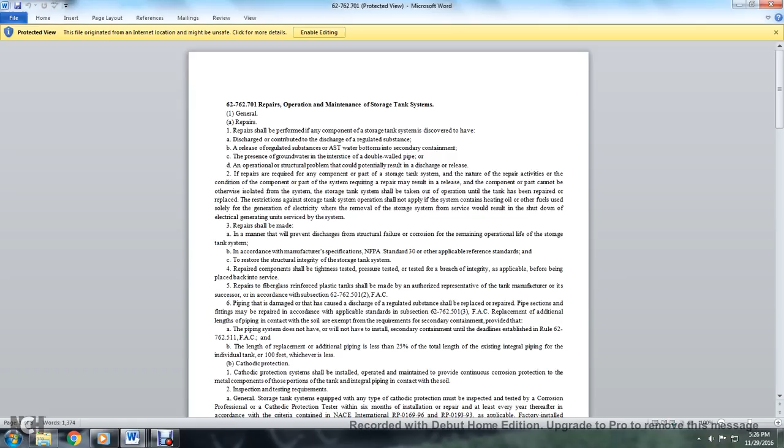Alright, this is going to be part 2 of chapter 62-762, petroleum storage tank systems, above ground storage tanks, and rules coming soon. Rule forms coming soon. Alright, Rule 62-762.701, repairs, operation, maintenance of storage tank systems.

For general repairs: repairs should be performed on any component of the storage tank system discovered to have contributed to a discharge or release of a regulated substance, including above ground storage water bottoms, secondary containment with presence of groundwater interstice, double wall piping, or operational structural components. If repairs are required for any part of the storage tank system, and the nature of the repair activities or the condition of the component requiring repair may result in a release, and the component cannot be otherwise isolated from the system, the storage tank system shall be taken out of operation until the tank has been repaired or replaced.

This restriction against operating the storage tank shall not apply if the system contains heating oil or other fuels used solely for generation of electricity, where removal of the storage system from service would result in the shutdown of electrical generation units serviced by the system.

The repair shall be made in a manner that prevents discharge from structural failure or corrosion for the remaining operational life of the storage tank system, in accordance with the manufacturer's specifications and National Fire Protection Association Standard 30, or applicable reference standards, to restore the structural integrity of the storage tank system.

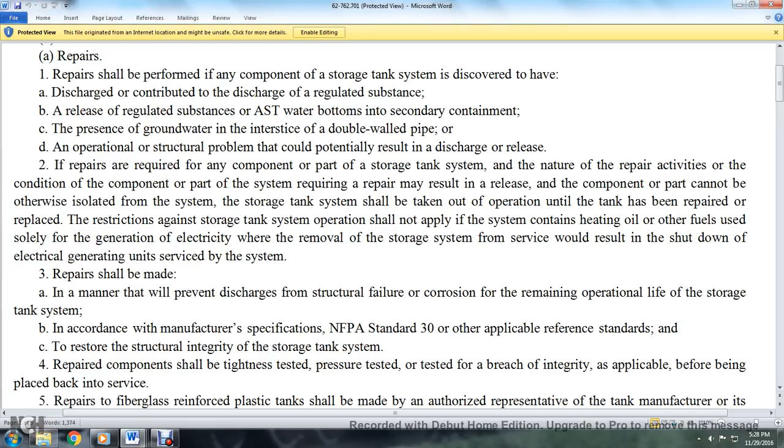Repaired components shall be tightness tested, pressure tested, and tested for breach integrity as applicable before being placed back into service. The repair of a fiberglass reinforced plastic tank shall be made by an authorized representative of the tank manufacturer, or its successor, or in accordance with subsection 62-762.501(2), Florida Administrative Code.

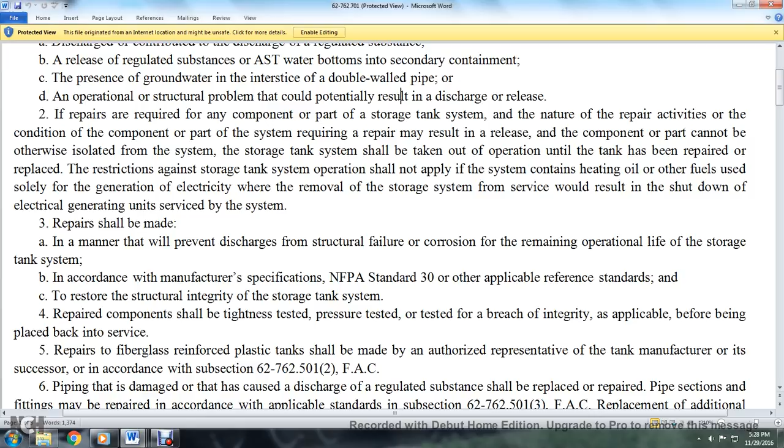Piping that has been damaged caused by the discharge of a regulated substance shall be replaced, and repair of pipe section failures may be repaired in accordance with the applicable standard, subsection 62-762.501(3), Florida Administrative Code.

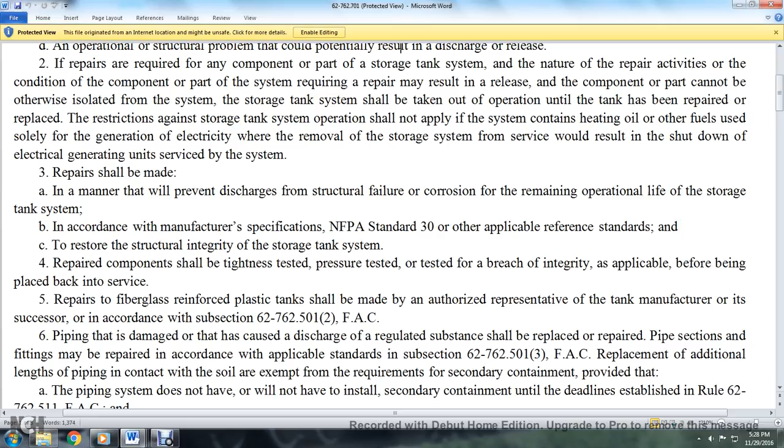Replacement of additional length of pipe in contact with the soil is exempt from the requirements of secondary containment, provided that the piping shall not have to install secondary containment until the deadlines established in Rule 62-762.511, Florida Administrative Code: B, the length of the replacement additional piping is less than 25% of the total length of the existing piping for the individual tank, or 100 feet, whichever is less.

Cathodic protection shall be installed, operated, and maintained to provide continuous corrosion protection to metal components of those portions of the tank and piping in contact with the soil.

Inspection and testing requirements, general: storage tank systems equipped with any type of cathodic protection must be inspected and tested by a Corrosion Professional or a Cathodic Protection Tester within 6 months of installation or repair, and at least every year thereafter, in accordance with the criteria contained in NACE International RP0169-96 or RP0193-93. Applicable factory installed galvanic cathodic protection systems may be tested every 3 years.

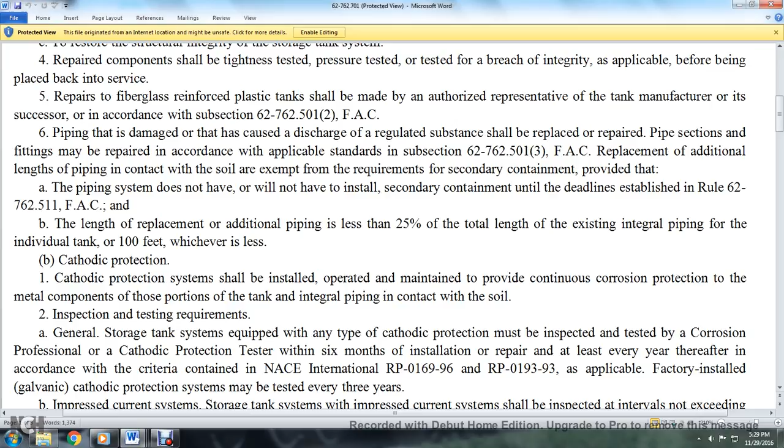Impressed current system: the storage tank system with an impressed current system shall be inspected at intervals not exceeding 2 months. All sources of impressed current shall be inspected. Evidence of proper functioning shall be current output, normal power consumption signal indication, normal operation, and satisfactory electrical state with the protected structure. An impressed current system that is inoperative for a cumulative period exceeding 1,440 hours shall be assessed by a corrosion professional to ensure the storage tank system is structurally sound and free of corrosion holes, operational in accordance with design criteria.

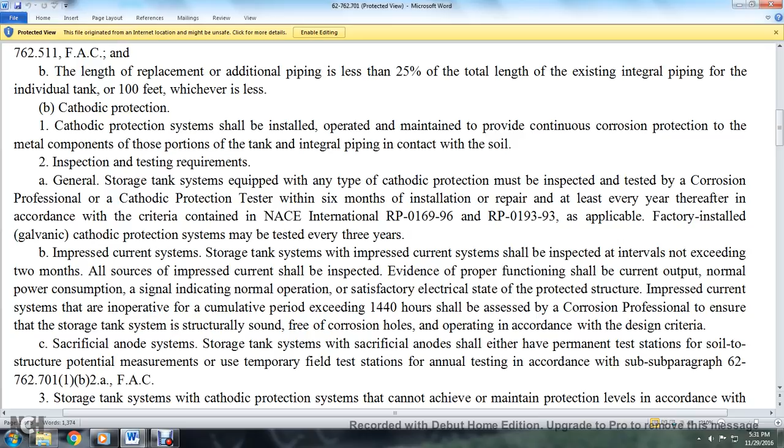Impressed current system: the storage tank system with an impressed current system shall be inspected at intervals not exceeding 2 months. All sources of impressed current shall be inspected. Evidence of proper function shall be current output normal, power consumption signal indication normal operation, satisfactory electrical state with protected structure. An impressed current system inoperative for a cumulative period exceeding 1,440 hours shall be assessed by a corrosion professional to ensure the storage tank system is structurally sound, free of corrosion holes, operational in accordance with design criteria. Structures with sacrificial anodes for storage tank systems with sacrificial anodes shall either have a permanent testing station for a soil-to-structure potential measurement or use a temporary field testing station, with annual testing in accordance with sub-subparagraph 62-762.701(1)(b)2.a., Florida Administrative Code.

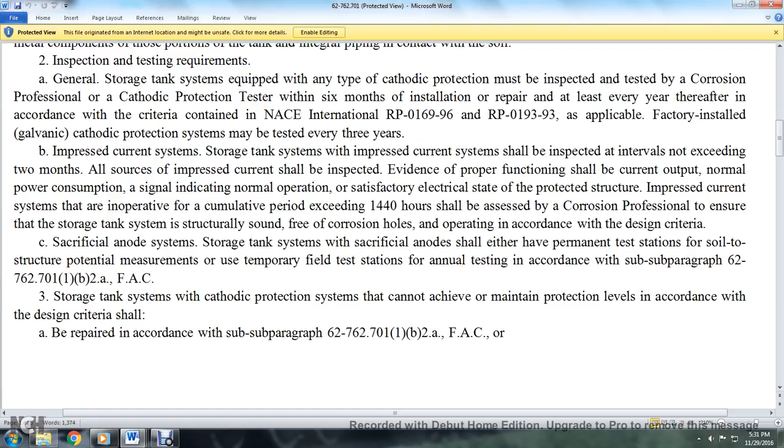Storage tank systems with cathodic protection systems that cannot achieve or maintain protection levels in accordance with the design criteria shall be repaired in accordance with subparagraph 62-762.701(1)(b)(2)(a) of the Florida Administrative Code, or be replaced or taken out of service in accordance with subsection 62-762.800(1), Florida Administrative Code.

The records of continuous operation of the impressed current system and all cathodic protection inspection and testing activities shall be maintained in accordance with paragraph 62-762.701(1)(b) of the Florida Administrative Code's operational maintenance requirements.

Spill containment devices, dispenser liners, and piping systems shall be maintained and provide access for monthly examination. Water removal is necessary. Water collected in spill containment devices, piping systems, and dispenser liners above the opening of any integral piping connection, along with any regulated substance collected within these storage tank systems, shall be removed and either reused or properly disposed of.

Owners and operators should ensure the available capacity in the tank is greater than the volume of regulated substances to be transferred to the tank. Before the transfer is made, they shall ensure that the transfer is monitored to prevent overfilling or spilling.

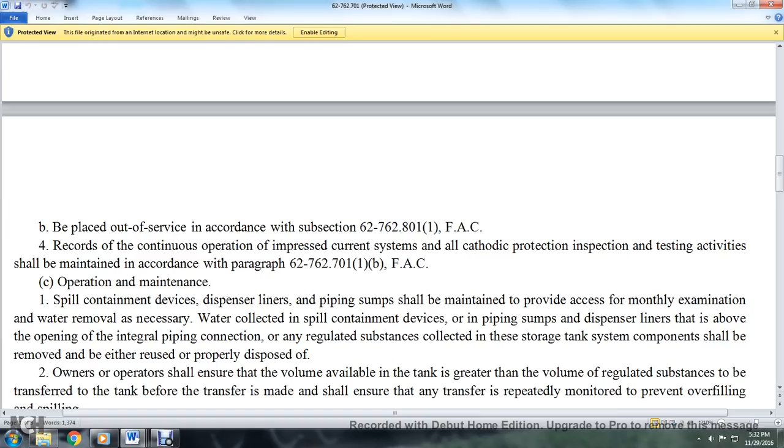All release detection devices shall be tested annually to ensure proper operation. The testing should be conducted per the manufacturer's specifications and should include, at minimum, a determination of whether the device operates as designed.

Petroleum contact with water: the storage tank system shall be managed in accordance with Chapter 62-740, Florida Administrative Code. Exterior coating may be maintained in accordance with SSPC-PA1.

Regardless of the method of release detection used, inventory control shall be performed on above-ground storage tanks containing vehicular fuel that do not have secondary containment, along with stormwater management and secondary containment systems.

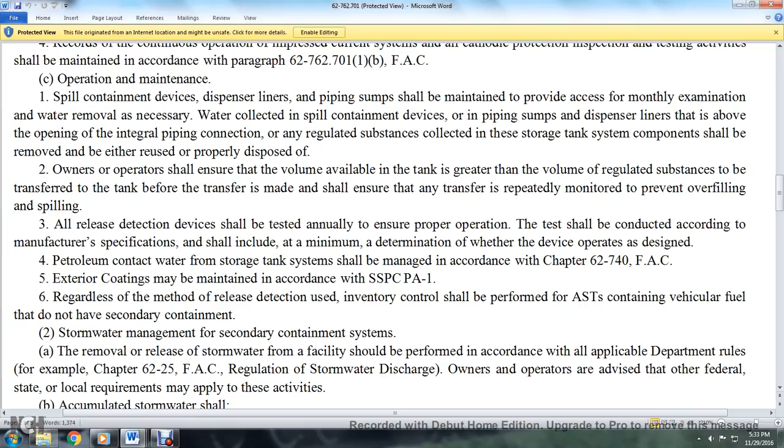Removal or release of stormwater from the facility should be performed in accordance with all applicable department rules, for example Chapter 62-25 of the Florida Administrative Code regulating stormwater discharge. Owners and operators are advised that other federal, state, and local requirements may apply to these activities.

Accumulated stormwater shall be drawn off within one week after a rainfall event, unless another frequency is allowed for the facility's stormwater discharge permit or other instruments such as the Spill Prevention Control and Countermeasure plan. Stormwater with a visible sheen shall not be discharged without treatment, per the department permit.

If gravity drain pipes are used to remove water from the dike or field areas, all valves involved shall be kept closed except when the operator is actively processing the drain water.

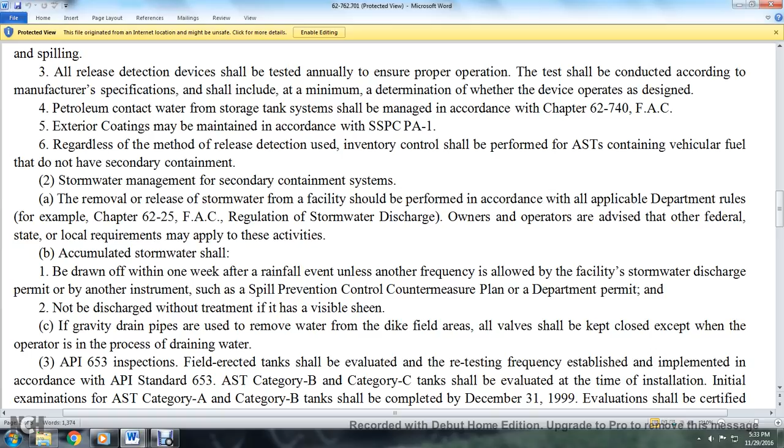API 653 inspection: field-erected tanks shall be evaluated, and the retesting frequency established and implemented in accordance with API Standard 653.

Above-ground storage tank Category B and Category C tanks shall be evaluated at the time of installation. For the initial examination, Category A and Category B tanks shall be completed by December 31st, 1999. The evaluation shall be certified by a professional engineer registered in the State of Florida, or approved by an API 653 inspector. Nondestructive testing shall be performed by qualified personnel as specified by API 653 and API 650.

A field-erected tank shall be repaired in accordance with API 653.

Testing the pipe in contact with the soil: small diameter piping shall be tightness tested before being placed back into service, whenever a dispenser connected to the piping is replaced, or whenever the piping has been disconnected and then reconnected.

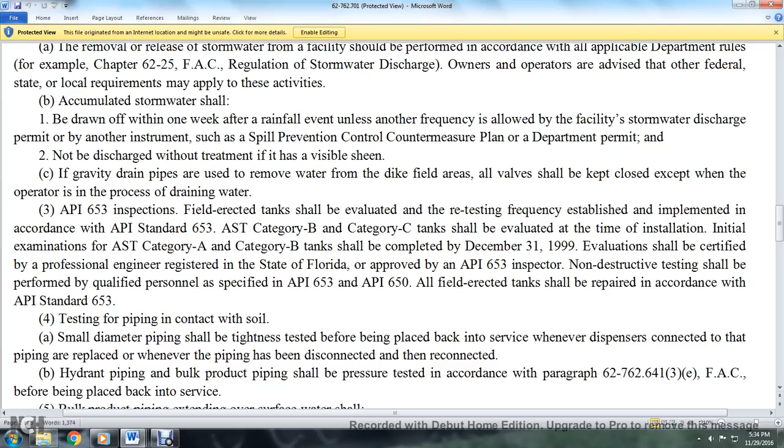Hydrant piping and bulk product piping shall be pressure tested in accordance with paragraph 62-762.641(3)(e) of the Florida Administrative Code before being placed back into service.

Bulk product piping extending over the surface of water shall be tested annually in accordance with Title 33, Part 156.170 of the Code of Federal Regulations, and shall be maintained and operated in accordance with Title 33, Part 154.

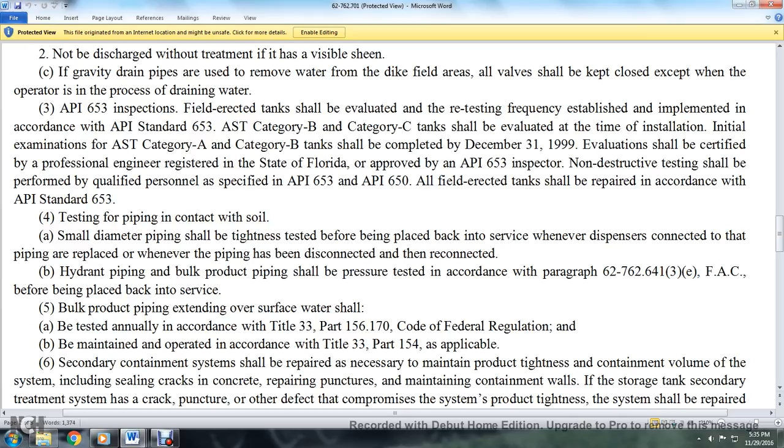Applicable secondary containment systems shall be repaired as necessary to maintain product tightness and containment volume, including sealing cracks in concrete and repairing punctures to maintain the containment wall of the storage tank. Where a secondary containment system has a crack, puncture, or other defect that compromises the system's product tightness, it shall be repaired in accordance with paragraph 62-762.501(1)(e) of the Florida Administrative Code.

Overfill protection shall be performed in accordance with API Recommended Practice 2350 and NFPA 30, Section 2-10, for each field-erected above-ground storage tank that receives fuel from a mainline pipeline or marine vessels. Specific authority statute.

376.303, Florida State Law implemented: 376.303, FS. History–New, June 21st, 2004.

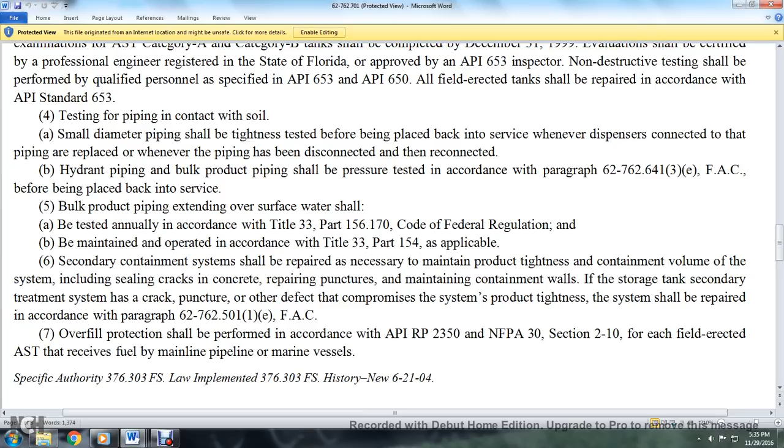Alright, we have this one to go, and another one.

62-762.711, record keeping. All records should be maintained in a permanent form available for inspection by the Department or the County. If the records are not kept at the facility, they should be made available at the facility or another agreed-upon location within 5 working days' notice. Access to the facility should be provided for compliance inspections conducted at reasonable times.

Records of the following shall be kept for 2 years: measurement and reconciliation of inventory, if applicable. Repair, operation and maintenance records of release detection results, including electronic test results, regardless of frequency. Monthly visual inspections performed in accordance with paragraph 62-762.641(2)(e), Florida Administrative Code.

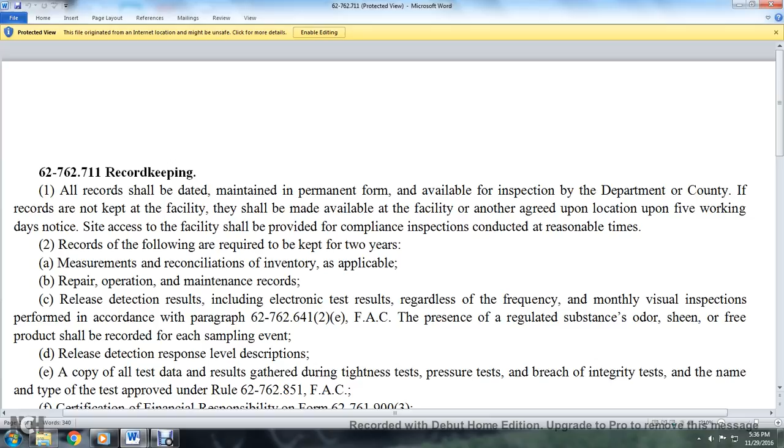The presence of regulated substance odor or sheen of the product shall be recorded with each sampling event. Release detection response level description. A copy of all test data results gathered during the tightness test and pressure test and breach of integrity test, and the name and type of test approved under 62-762.851, Florida Administrative Code. Certification of Financial Responsibility Form 62-761.900(3).

Record of the type of fuels stored in each tank, and of the repair or replacement of gaskets, valve packing, valve flanges, connecting and disconnecting fittings of bulk product piping when the repair or replacement is performed. The response to a discharge or loss of regulated substance. Records of the following generated after July 13, 1998 shall be maintained for the life of the storage tank system.

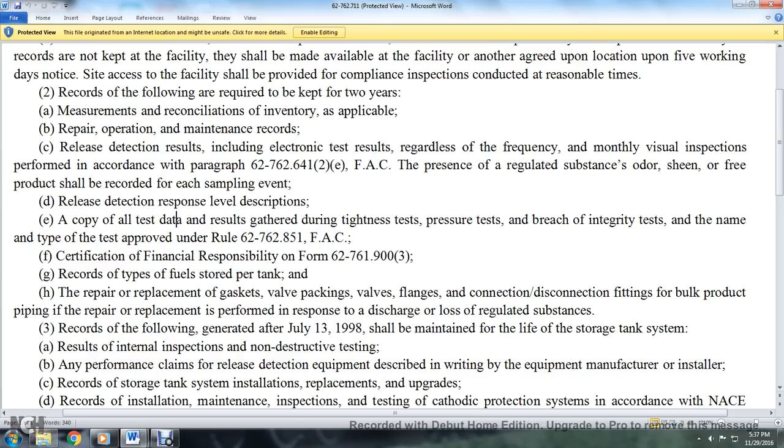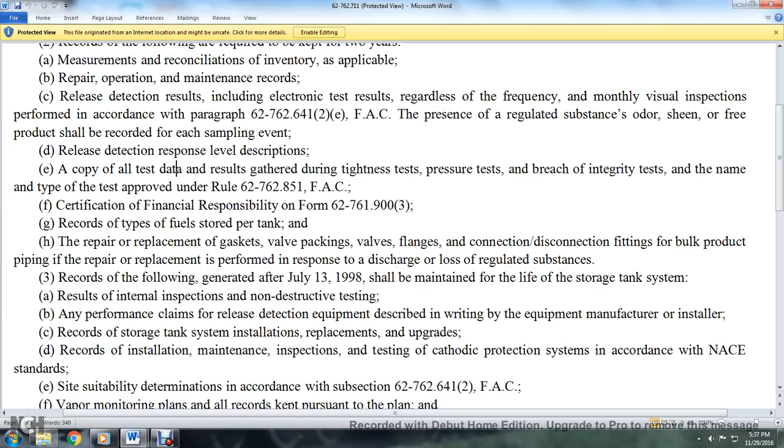The results of internal inspections, non-destructive testing, any performance claims for release detection equipment described in writing by the equipment manufacturer, and records of storage tank installation, replacement, and upgrades. Records of the installation, maintenance, inspection and testing of the cathodic protection system in accordance with NACE standards, and of site suitability determinations in accordance with subsection 62-762.641(2), Florida Administrative Code. Vapor monitoring plans.

All records kept pursuant to the plan. The closure assessment report, if the location continues as a facility. Specific authority 376.303, Florida Statutes. Law implemented 376.303, Florida Statutes. History: New June 21st, 2004.

And this is probably the last one. Let me check real quick. Well, we got 801.

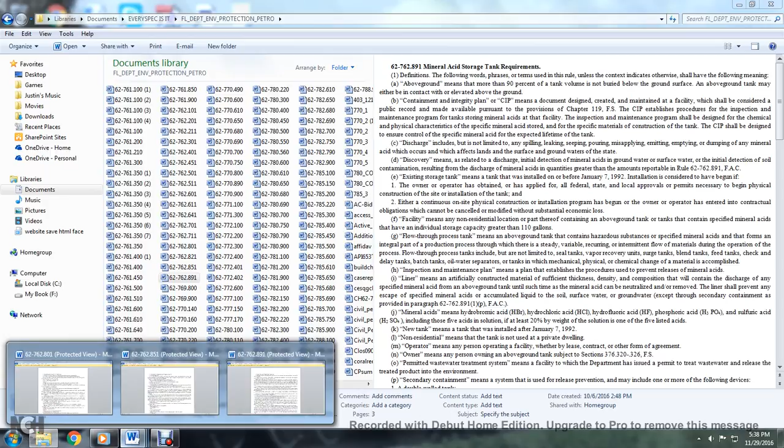All right, 62-762.801, out-of-service and closure requirements. Temporarily out of service: storage tank systems that are temporarily out of service shall continue to operate and maintain corrosion protection in accordance with paragraph 62-762.701(1)(b), Florida Administrative Code. The tank shall have an external release detection method, performing release detection monthly in accordance with the applicable provisions of 62-762.601 through 641, Florida Administrative Code, leaving the venting system open and functioning.

Out of service storage tank systems: in general, storage tank systems that are taken out of service, defined in subsection 62-762.201(53), Florida Administrative Code, shall continue to operate and maintain corrosion protection in accordance with paragraph 62-762.701(1)(b), Florida Administrative Code, and perform external release detection for sites without contamination, if applicable, every 6 months in accordance with the provisions of subsection 62-762.641(2), Florida Administrative Code.

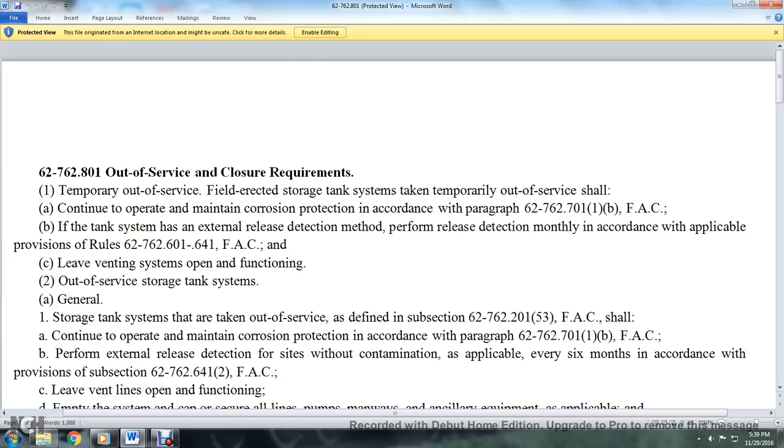Leave the vent lines open and functional, empty the system, cap and secure all lines, pumps, manways, and ancillary equipment as applicable, and secure and close off the system from outside access. If the storage tank system is required to be upgraded during the time that it is out of service, it shall be upgraded or replaced in accordance with this chapter before it is returned to service.

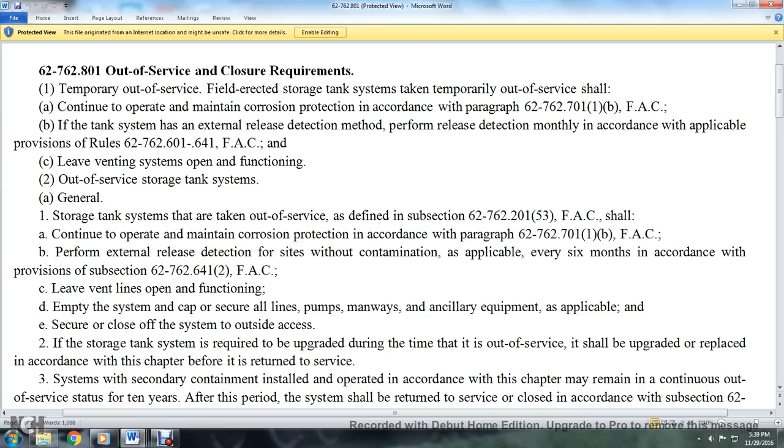Systems with secondary containment installed and operated in accordance with this chapter may remain in continuous out of service status for 10 years, after which the system shall be returned to service or closed in accordance with section 62-762.801(3), Florida Administrative Code. Tightness or pressure tests shall be performed in accordance with subsection 62-762.641(3), Florida Administrative Code, as applicable, before any system is returned to service.

Systems without secondary containment shall not remain in continuous out of service status for more than 5 years. Before expiration of the 5-year time period, any remaining product and sludge shall be removed and a closure assessment shall be performed in accordance with subsection 62-762.801(4), Florida Administrative Code.

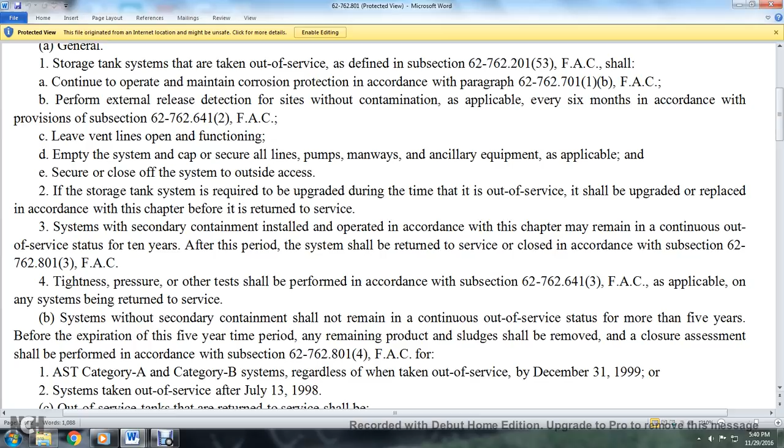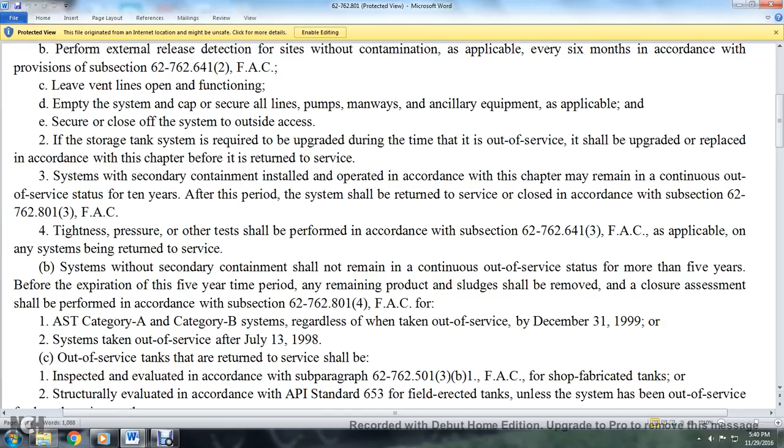The above-ground storage tank, the Category A and Category B systems, regardless of whether taken out of service before December 31st, 1999, or systems taken out of service after July 13, 1998, an out-of-service tank returned to service shall be inspected and evaluated in accordance with subparagraph 62-762.501(3)(b)1, Florida Administrative Code, for shop fabricated tanks, and structurally evaluated in accordance with API Standard 653 for field-erected tanks, unless the system has been out of service for less than 6 months. A field-erected tank changing the type of product stored within the tank shall comply with API Standard 653, section 2.2.4.

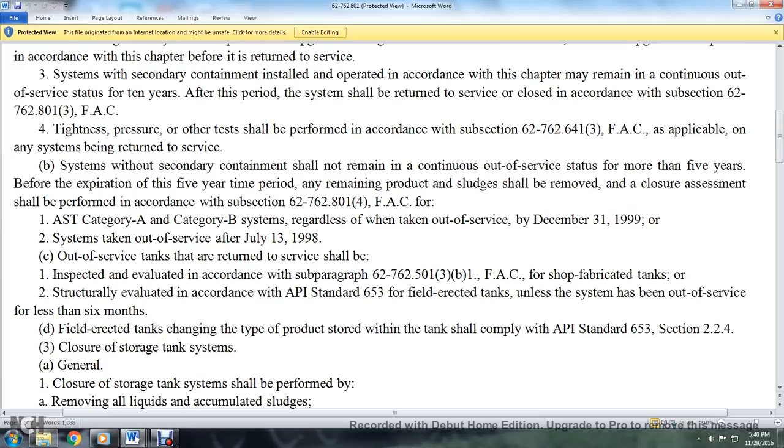Closure of storage tanks in general: the closure of the storage tank shall be performed by removing all the liquids and accumulated sludges; disconnecting, capping, or removing integral piping; manways shall be secured to prevent access; closing the storage tank in accordance with paragraph 62-762.801(3)(b), Florida Administrative Code, as applicable; and conducting a closure assessment in accordance with subsection 62-762.801(4), Florida Administrative Code.

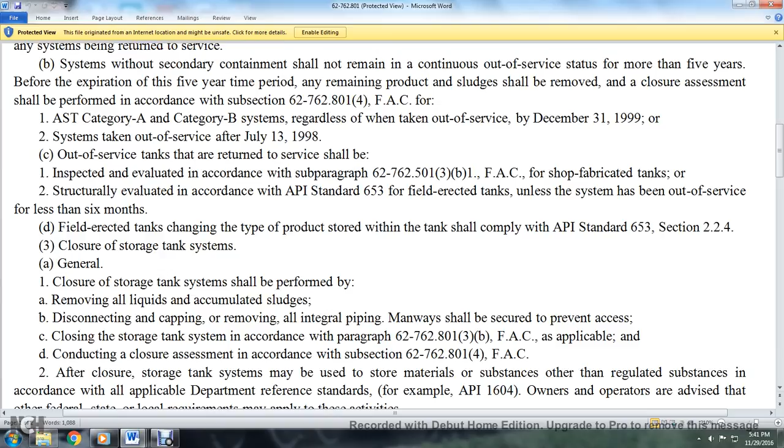After closure, the storage tank system may be used to store materials or substances other than regulated substances in accordance with the applicable Department reference standards, for example API 1604. Owners and operators are advised that other federal, state, and local requirements may apply to these activities. Monitoring wells associated with the closed system that are not being used for release detection or site assessment purposes should be closed in accordance with paragraph 62-762.601(1)(k).

Florida Administrative Code. Unmaintained systems shall be permanently closed within 90 days of the discovery. The tank shall be rendered free of pollutant vapors at the time of closure, prevent hazardous explosive conditions, and be maintained to prevent future explosive conditions. The tank should be protected from flotation in accordance with NFPA 30, section 26.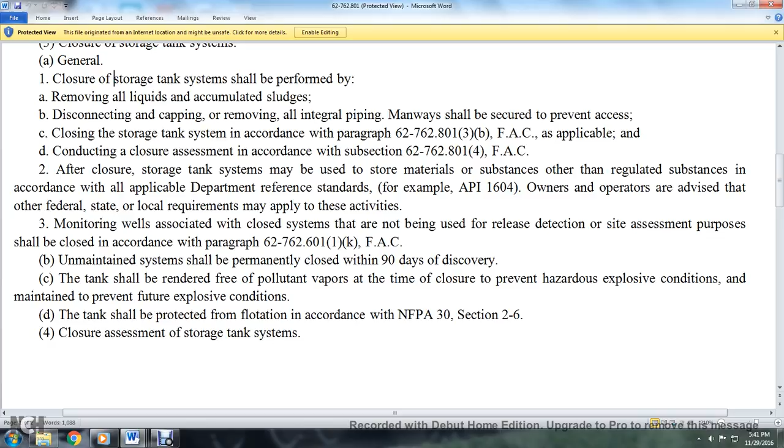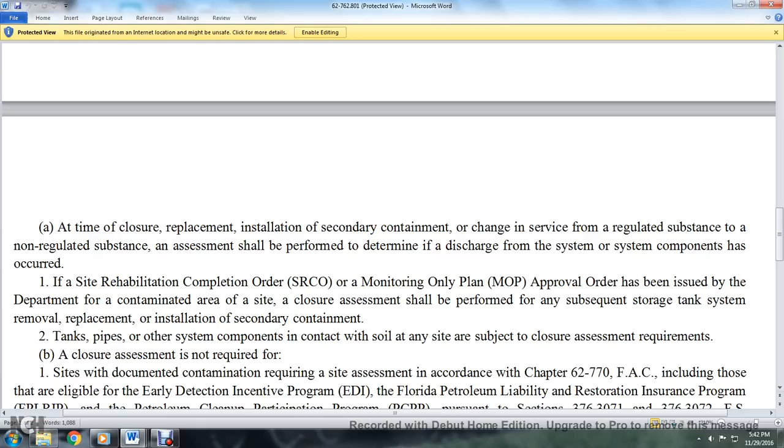Closure assessment of the storage tank system. A. At the time of closure, replacement, installation of secondary containment, or change from a regulated substance to a non-regulated substance, an assessment shall be performed to determine if a discharge from the system or system components has occurred. If a site rehabilitation completion order or monitoring only plan approval order has been issued by the department for the contaminated area of the site, a closure assessment shall be performed for any subsequent storage tank system removal, replacement, installation of secondary containment. 2. Tanks, pipes, or other system components in contact with the soil at any site are subject to the closure assessment requirements.

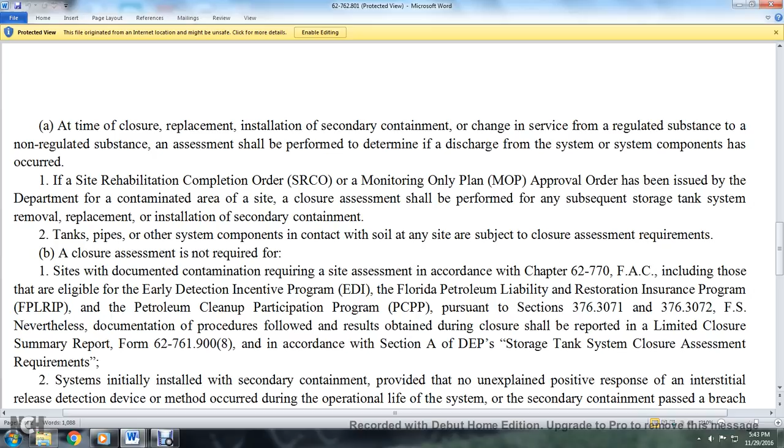B. The closure assessment is not required for sites with documented contamination requiring site assessment in accordance with Chapter 62-770, Florida Administrative Code, including those that are eligible for the Early Detection Incentive Program, the Florida Petroleum Liability and Restoration Insurance Program, or the Petroleum Cleanup Participation Program pursuant to Sections 376.3071 and 376.3072, Florida Statutes. Nevertheless, documentation of procedures followed and results obtained during the closure shall be reported with the Limited Closure Summary Report Form 62-761.900 in accordance with section A of the DEP Storage Tank System Closure Assessment Requirements.

2. Systems initially installed with secondary containment, provided there was no unexplained positive response from the interstitial release detection device or method during the operational life of the system, or the secondary containment passed a breach of integrity test prior to closure. Systems upgraded with secondary containment that are closed, where a closure assessment was performed prior to installation of the secondary containment, provided the secondary containment passed a breach of integrity test in accordance with paragraph 62-762.641(3)(a), Florida Administrative Code.

Double wall shop fabricated above ground tanks with a storage capacity less than 1,100 gallons, upgraded with secondary containment, that are elevated and not in contact with the soil. Instead of performing the closure assessment, a visual inspection may be performed of the system and the ground surface underneath for signs of a discharge. Written certification shall be provided to the county within 10 days after the installation of secondary containment, documenting that there has been no discharge, in lieu of a closure assessment.

The sampling analysis should be conducted according to the DEP Storage Tank System Closure Assessment Requirements. The closure assessment report shall be submitted to the county within 60 days of the completion of any of the activities listed in paragraph 62-762.801(4)(a), Florida Administrative Code. The report shall include the sample types, sample locations, measurement methods, site map, method of maintaining quality assurance and quality control, and any analytical results obtained during the assessment, in accordance with the DEP Storage Tank System Closure Assessment Requirements.

Persons are advised that contaminated soil that is excavated, disposed of, or stockpiled on the site during the closure of the storage tank system is regulated by Chapter 62-770, Florida Administrative Code. Specific authority 376.303, Florida Statutes, and 376.303, Florida Statutes. History: New, June 21st, 2004.

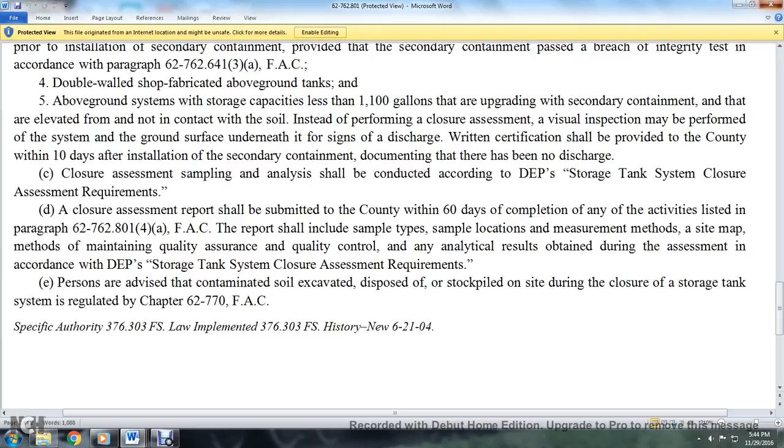Alright, 62-762.851. Alternative requirements, equipment approval. The alternative requirement. Any person subject to the provisions of the chapter may request a written determination of the secretary or the secretary's designee that any of the requirements of the chapter shall not apply to the regulated storage tank system at a facility, and shall request the approval of the alternate procedure or requirement.

The request shall set forth at minimum the following information: the specific storage tank system of the facility for which the exception is sought, the specific provision of chapter 62-762 Florida Administrative Code from which exception is sought, with the basis for the exception, the alternative procedure or requirement for which approval is sought. Documentation demonstrating the alternative procedure for the requirement provides an equivalent or greater degree of protection for the lands, surface waters, and groundwaters of the state as established by the requirement.

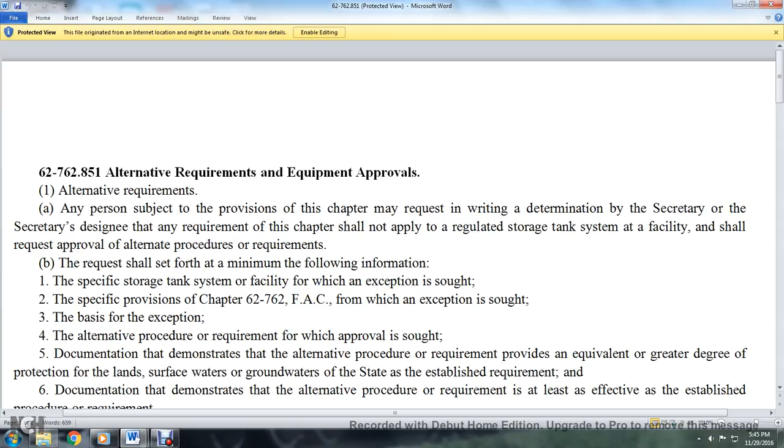Documentation demonstrating the alternative procedure for the requirement is at least as effective as the established procedure of the requirement. If any alternate procedure requirement is not available to be sought under subparagraphs 5 and 6, documentation demonstrating that the specific provision of the chapter from which the exception is sought imposes regulatory costs on the regulated entity that could be reduced through the approval of a less costly regulatory alternative requirement that provides a substantially equivalent degree of protection of the lands, surface waters, and groundwaters of the state as established in the requirement.

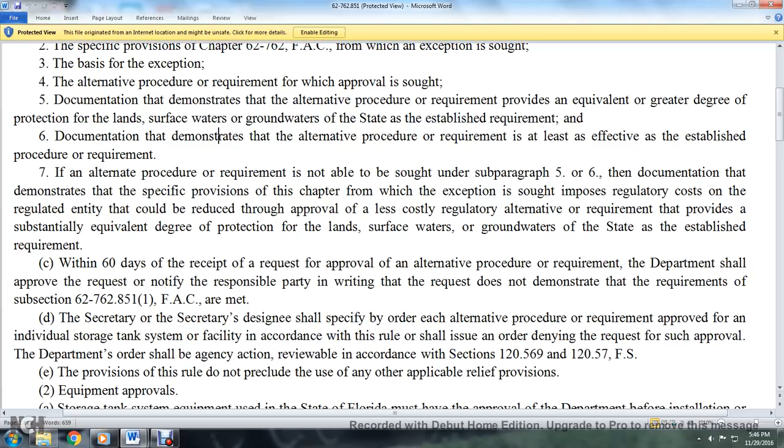C. Within 60 days of the receipt of the request for approval of the alternative procedure for the requirement, the department shall approve the request or notify the responsible party in writing that the request does not demonstrate that the requirements of subsection 62-762.851 Florida Administrative Code are met. Alright, D. The Secretary's designee shall specify by order the alternative procedure requirements approved for an individual storage tank system facility in accordance with these rules, or shall issue an order denying the request for such approval. The department order shall be agency action reviewable in accordance with sections 120.569 and 120.57, Florida Statutes. The provisions of this rule do not preclude the use of any other applicable relief provisions.

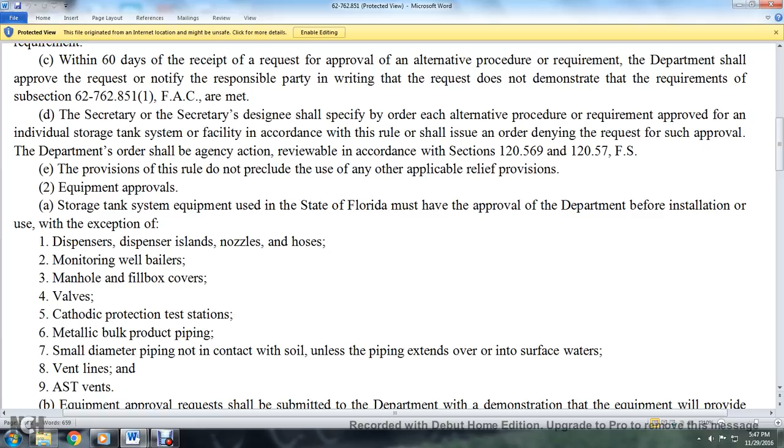2. Equipment approval. Storage tank system equipment put into use in the state of Florida must be approved by the department before installation or use, with the exemption of dispenser islands, nozzles, hoses, monitoring well bailers, manhole and fillbox covers, valves, cathodic protection test stations, metallic bulk product piping, small diameter piping not in contact with the soil unless the piping extends over surface waters, vent lines, and aboveground storage tank vents. Equipment approval requests should be submitted to the department demonstrating that the equipment will provide equivalent protection meeting the appropriate performance standards contained in this chapter.

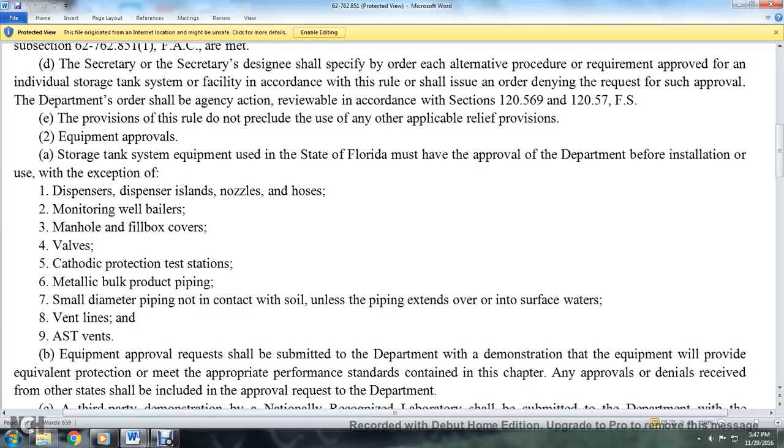Any approvals or denials received from other states shall be included with the approval request to the department. A third-party demonstration by a nationally recognized laboratory shall be submitted to the department with the application. The third-party demonstration shall provide a technical evaluation of the equipment, test results verifying the equipment will function as designed, and professional certification that the equipment meets the performance standards contained in Rule 62-762.501 Florida Administrative Code.

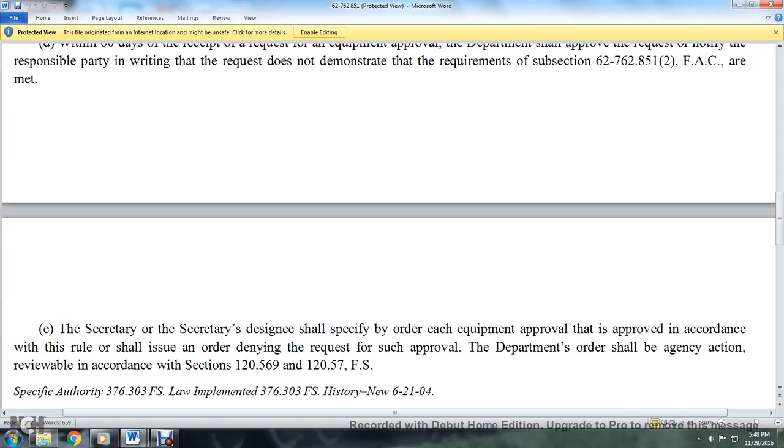D. Within 60 days of the receipt of the request for equipment approval, the department shall approve the request or notify the responsible party in writing that the request does not demonstrate the requirements of subsection 62-762.851(2) Florida Administrative Code are met. The secretary's designee shall specify by order each equipment approval that is approved in accordance with the rules, or shall issue an order denying the request for such approval. The department order shall be agency action reviewable in accordance with sections 120.569 and 120.57 Florida Statutes. Specific authority 376.303 Florida Statutes, law implemented 376.303 Florida Statutes. History new June 21st, 2004.

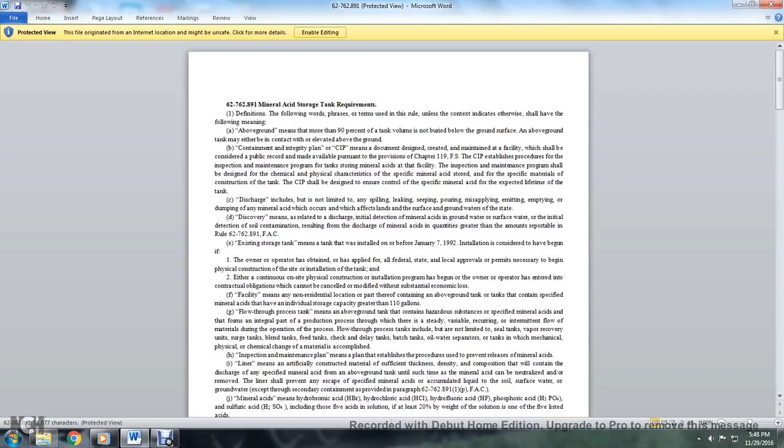And I believe we got one more of these to read. And it's pretty lengthy. All right.

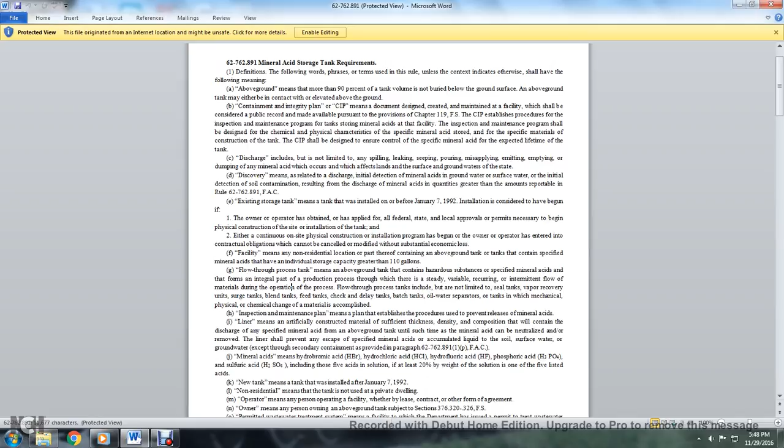62-762.891, mineral acid storage tank requirements. Definitions: the following words, phrases, or terms used in the rule, unless the context indicates otherwise, shall have the following meaning. Above ground means with more than 90% of the tank volume not buried below the ground surface; the tank may either be in contact with the ground or elevated above the ground.

Containment integrity plan, or CIP, means the document designed, created, and maintained at the facility, which shall be considered a public record made available pursuant to the provisions in Chapter 119 Florida Statutes. The containment integrity plan establishes procedures for the inspection and maintenance program for the tanks storing mineral acid at the facility. The inspection and maintenance program shall be designed for the chemical and physical characteristics of the specific mineral acid stored and the specific material of construction of the tank.

The containment integrity plan shall be designed to ensure control of the specific mineral acid for the expected life of the tank. Discharge includes but is not limited to any spilling, leaking, seeping, pouring, misapplying, emitting, emptying, and dumping of any mineral acids which occurs and which affects the lands and the surface or groundwaters of the state.

Discovery means, related to the discharge, the initial detection of the mineral acid in the groundwater or surface water, or initial detection of soil contamination resulting from the discharge of mineral acids if the quantity is greater than the reportable amount in Rule 62-762.891, Florida Administrative Code.

Existing storage tank means a tank that was installed on or before January 7, 1992. Installation is considered to have begun if the owner or operator has obtained or applied for all federal, state, and local approvals and permits necessary to begin physical construction of the site and installation of the tank, and either a continuous on-site physical construction or installation program has begun, or the owner or operator has entered into contractual obligations which cannot be canceled or modified without substantial economic loss.

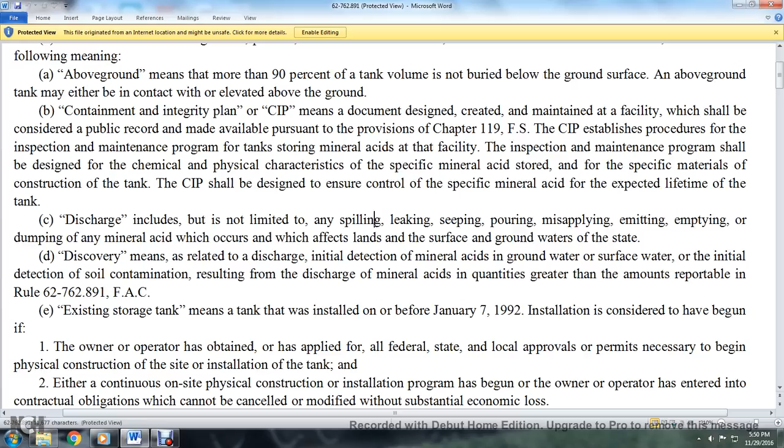Facility means any non-residential location, or part thereof, containing an above-ground tank or tanks that contain specified mineral acids and have an individual storage tank capacity greater than 110 gallons.

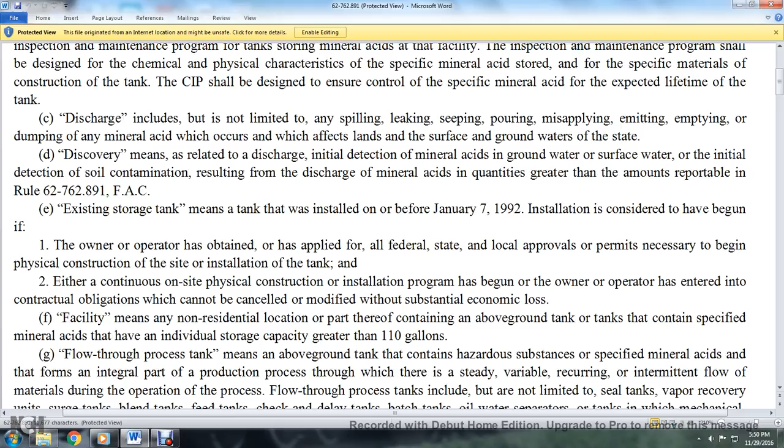G. Flow-through process tank means an above-ground tank that contains a hazardous substance or specified mineral acid and forms an integral part of a production process through which there is a steady, variable, recurring, or intermittent flow of materials during the operation of the process. Flow-through process tanks include but are not limited to seal tanks, vapor recovery units, surge tanks, blending tanks, feed tanks, check and delay tanks, batch tanks, and oil-water separator tanks, in which mechanical, physical, or chemical change of the material is accomplished. Inspection and maintenance plan means the plan established in the procedure used to prevent release of the mineral acids.

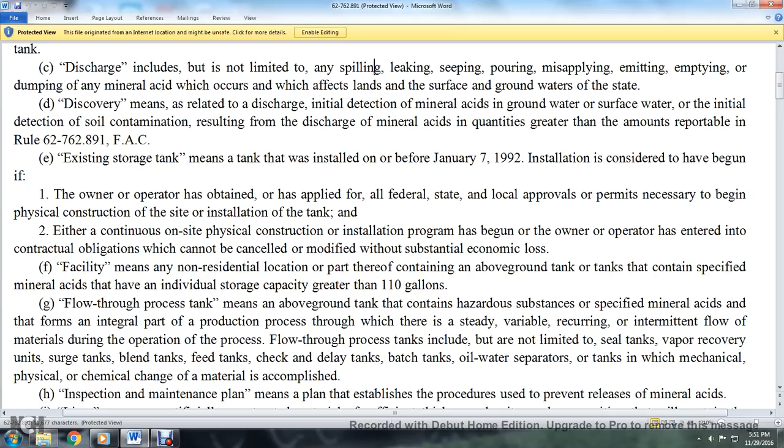Liner means an artificially constructed material of sufficient thickness, density, and composition that will contain the discharge of any specified mineral acid from the above-ground tank until such time the mineral acid can be neutralized and/or removed. The liner shall prevent any escape of the specified mineral acids or accumulated liquid to the soil, surface water, and/or groundwater, except for the secondary containment that is provided in paragraph 62-762.891(1)(p), Florida Administrative Code.

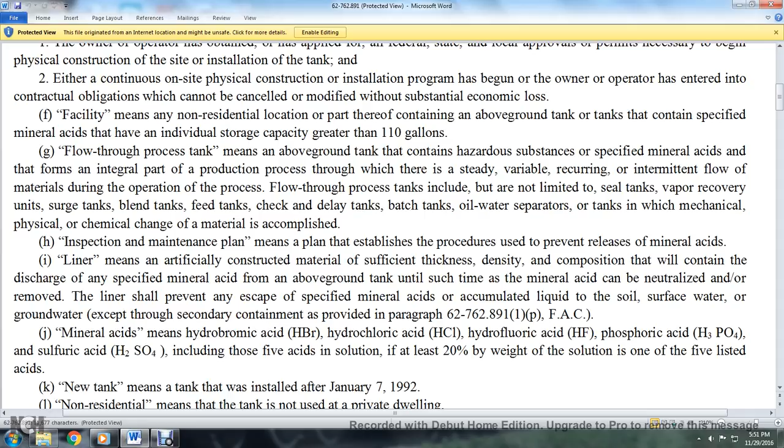Mineral acids means hydrobromic acid, hydrochloric acid, hydrofluoric acid, phosphoric acid, or sulfuric acid, including those 5 acids in solution if at least 20% of the weight of the solution is one of the 5 acids. New tank means a tank installed after January 7, 1992. Non-residential means the tank is not used by a private dwelling.

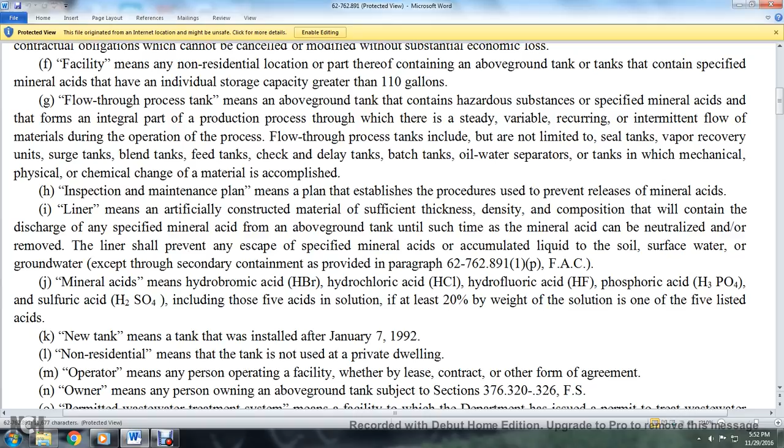Operator means any person operating a facility, whether by lease, contract, or other form of agreement. Owner means any person owning an above-ground tank subject to Sections 376.320 through 376.326, Florida Statutes. Permitted wastewater treatment system means a facility for which the department has issued a permit to treat wastewater with the release of the treated product into the environment.

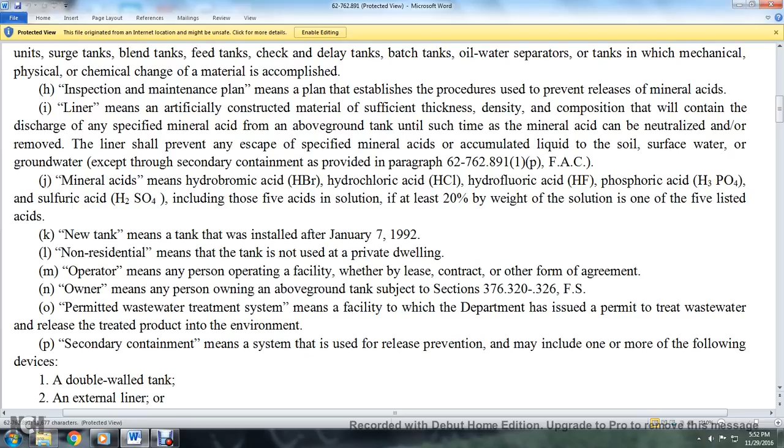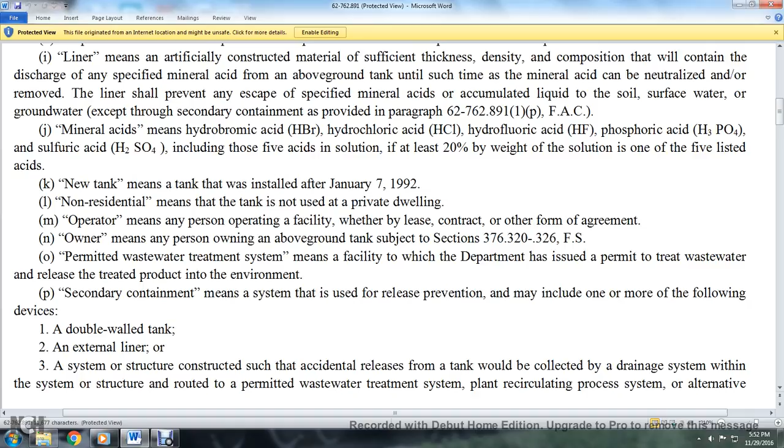Secondary containment means a system used for release prevention and may include one or more of the following devices: a double-walled tank, an external liner system, a structure constructed such that an accidental release from the tank would be collected by a drain system within the structure and routed to a permitted wastewater treatment system, plant recirculating process system, or an alternative containment system approved by the department in accordance with Rule 62-762.851.

Stationary means the tank is not meant to be moved to multiple sites and is used to remain in one location of the facility site for a period of 180 days or longer. Tank means an above ground stationary device constructed primarily of non-earthen materials, concrete, metal, plastic, glass, that provides structural support, designed primarily to contain mineral acids.

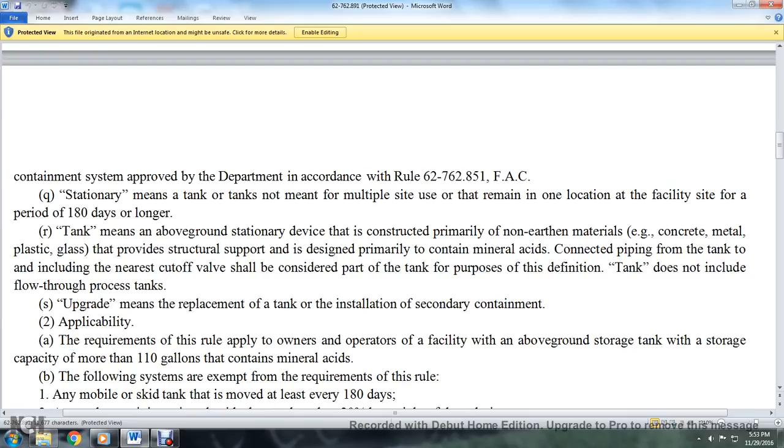Connected piping from the tank, including the nearest cutoff valve, shall be considered part of the tank for purposes of the definition. Tank does not include flow-through process tanks. Tank upgrade means the replacement of the tank or the installation of secondary containment. Applicability: requirements of the rules apply to owners and operators of facilities with above-ground storage tanks with a storage capacity of more than 110 gallons containing mineral acids.

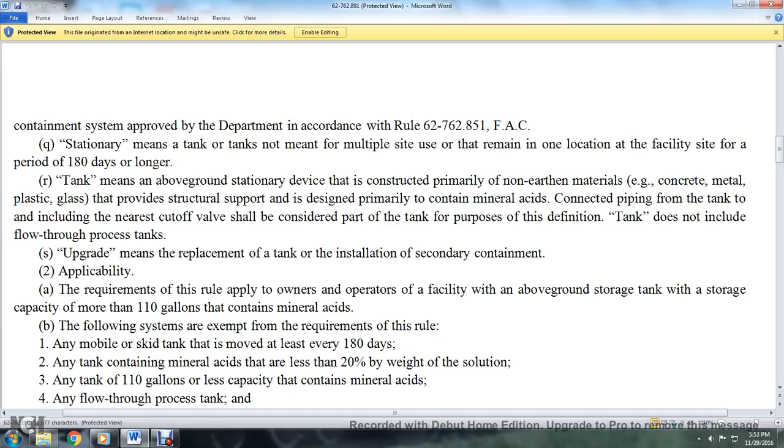The following systems are exempt from the requirements of this rule: any mobile or skid tank moved at least once every 180 days. Any tank containing mineral acid that is less than 20% by weight of the solution. Any tank of 110 gallons or less capacity that contains mineral acids. Any flow-through process tank. Any tank containing mineral acids that are regulated as hazardous waste under Subtitle C of the Resource Conservation and Recovery Act. Registration.

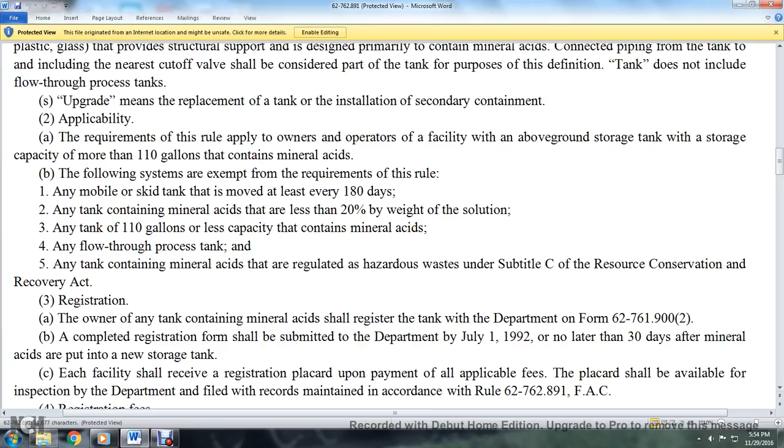The owner of any tank containing mineral acid shall register the tank with the department on Form 62-761.900(2). Completed registration forms shall be submitted to the department by July 1st, 1992, or no later than 30 days after mineral acids are put in a new storage tank. Each facility shall receive a registration placard upon payment of the applicable fees. The placard should be available for inspection by the department, filed with the records maintained in accordance with Rule 62-762.891, Florida Administrative Code.

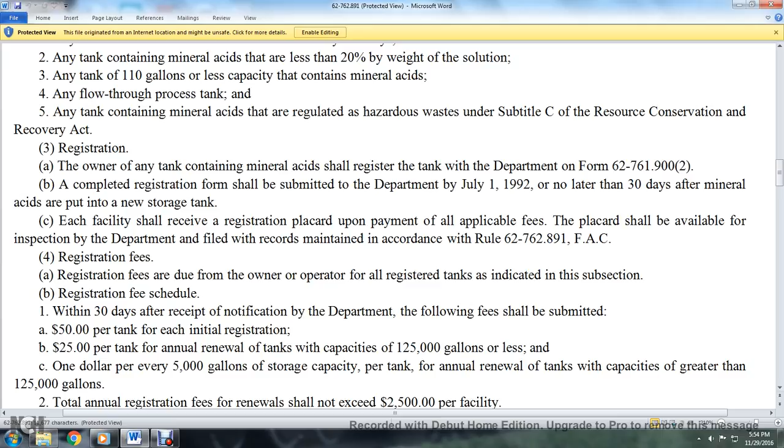Registration fees. The registration fees are due from the owner or operator for all registered tanks as indicated in the registration fee schedule subsection. Within 30 days after receipt of notification from the department, the following fees shall be submitted: $50 per tank for the initial annual registration, $25 per tank for annual renewal of tanks with a capacity of 125,000 gallons or less, $1 per every 5,000 gallons of storage capacity per tank for annual renewal of tanks with a capacity greater than 125,000 gallons. Total annual registration fees for renewal shall not exceed $2,500 per facility.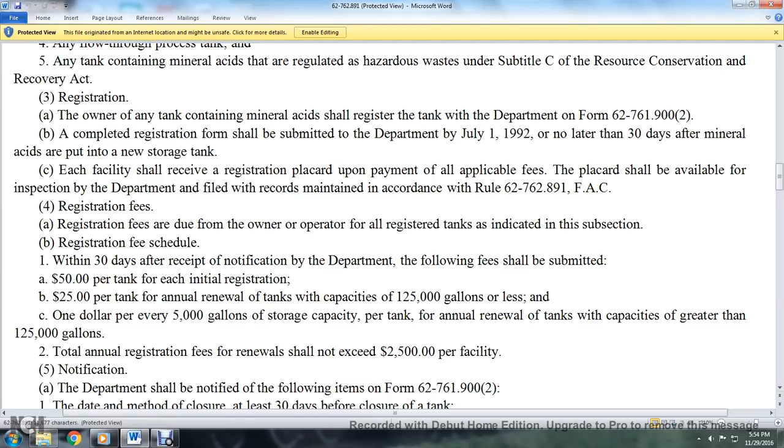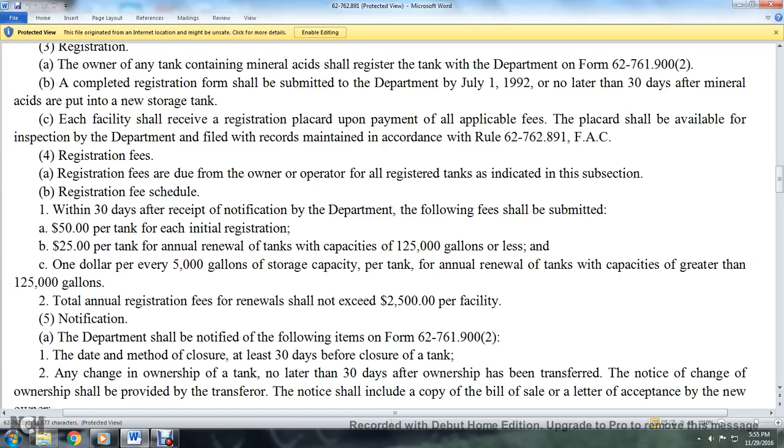Notification: the department shall be notified of the following items on Form 62-761.900(2). The date and method of closure at least 30 days before closure of the tank. Any change of ownership of the tank no later than 30 days after ownership has been transferred. The notice of change of ownership shall include a copy of the bill of sale or a letter of acceptance by the new owner. Upgrading the tank at least 10 days before the upgrading occurs, except for emergency replacement of tanks and connected piping required by an actual or anticipated discharge. Emergency replacement notification should be provided within 10 days after the emergency replacement.

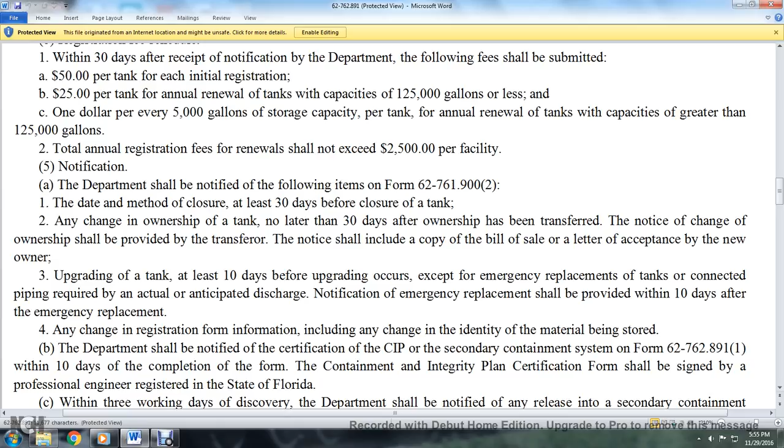Any change in registration information, including any change in the identity of the material being stored, shall be notified to the department, as well as certification of the CIP or secondary containment system on Form 62-762.891(1) within 10 days of completion. The containment integrity plan certification form shall be signed by a professional engineer registered in the state of Florida.

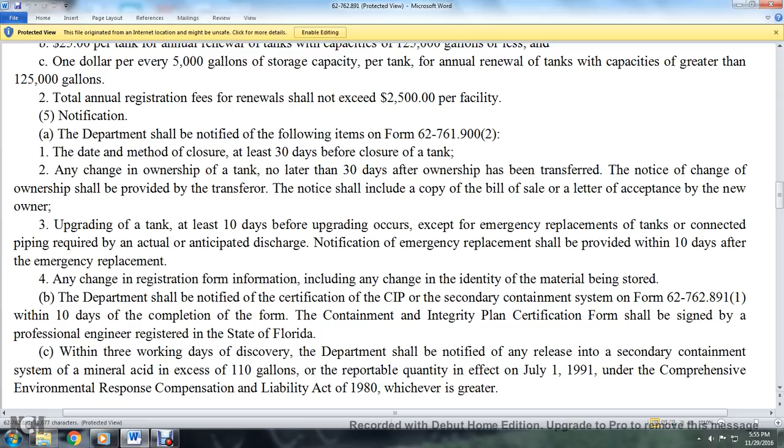Within 3 working days of discovery, the department shall be notified of any release into a secondary containment system of mineral acid in excess of 110 gallons or the reportable quantity effective July 1st, 1991, under the Comprehensive Environmental Response, Compensation, and Liability Act of 1980, whichever is greater. Reporting discharges: within 24 hours of discovery or before the close of the next business day, Form 62-761.900(1) shall be used to report any discharge exceeding 100 pounds of hydrofluoric acid, 1,000 pounds of sulfuric acid, or 5,000 pounds of hydrochloric or phosphoric acid. Performance standards of mineral acid tanks.

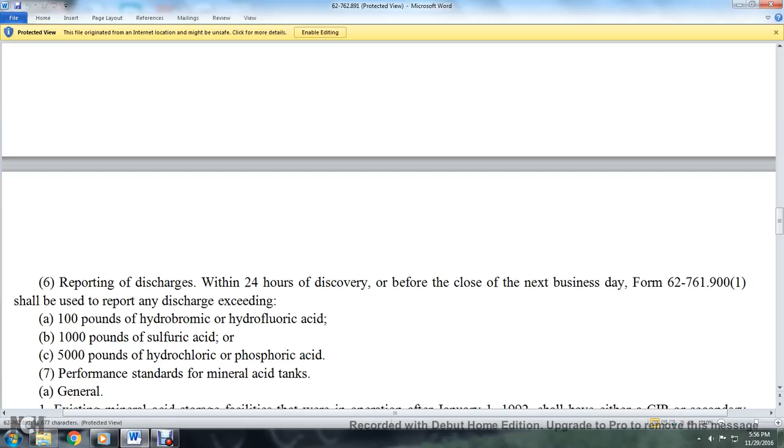In general, existing mineral acid storage facilities that were in operation after January 1st, 1992 shall have either a CIP or secondary containment, and new or replacement mineral acid tanks installed after July 1st, 1992 shall have secondary containment with integrity plans. Containment integrity plans should include procedure requirements to minimize the risk of spills, releases, and discharges from the tanks. The containment integrity plans should be reviewed and updated at least every 2 years by a professional engineer registered in the state of Florida. The containment integrity plan shall be made available for inspection by the department and shall address an inspection and maintenance program detailing the qualifications of the person performing the inspection.

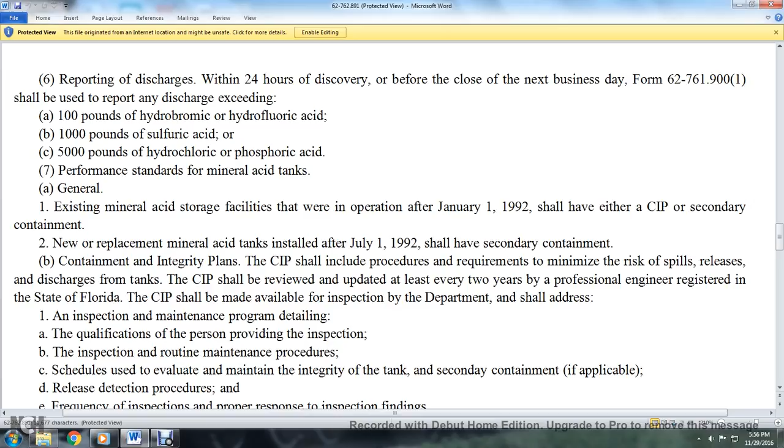The inspection and routine maintenance procedure schedule used to evaluate and maintain the integrity of the tank, including secondary containment if applicable, release detection procedures, frequency of inspection, proper response to inspection findings, the material and construction of each tank, and the compatibility of materials with mineral acids.

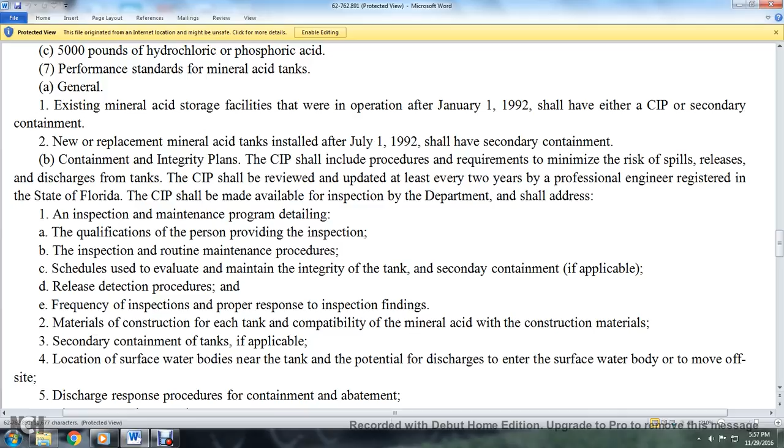Secondary containment of the tanks, if applicable, location relative to surface water bodies near the tank, the potential for discharge to move off site, and response procedures for containment, abatement, and cleanup of tanks without secondary containment.

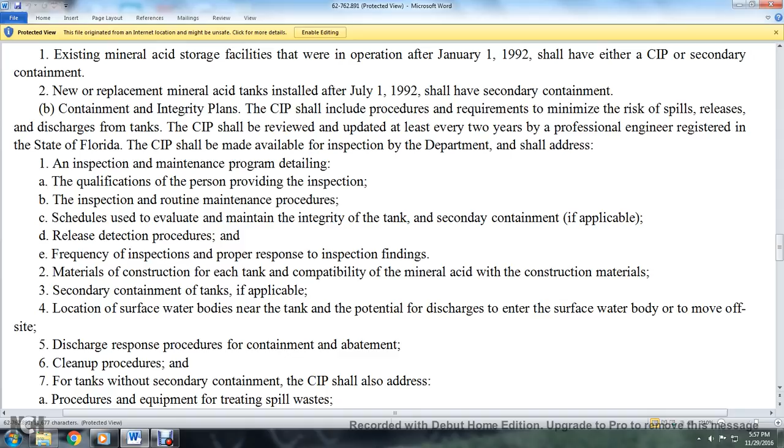The containment integrity plan shall also address procedures and equipment for treating spill waste, procedures for disposing of spill waste, and diversion structures to prevent discharge to nearby surface water bodies or from moving off site.

Demonstrating corrosion protection of the tanks if they are in contact with the soil. Containment integrity plan alternatives. In place of the CIP, a certification may be provided to the department by a professional engineer registered with the State of Florida.

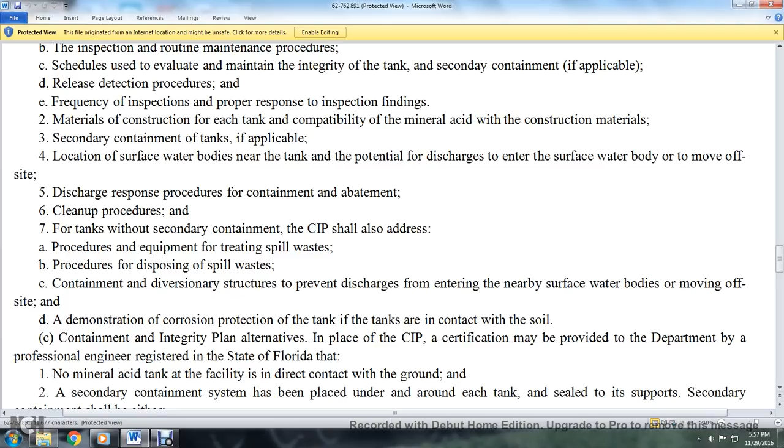No mineral acid tank at the facility is in direct contact with the ground, a secondary containment system has been placed under and around the tank. Sealed to its supports. Secondary containment shall be either...

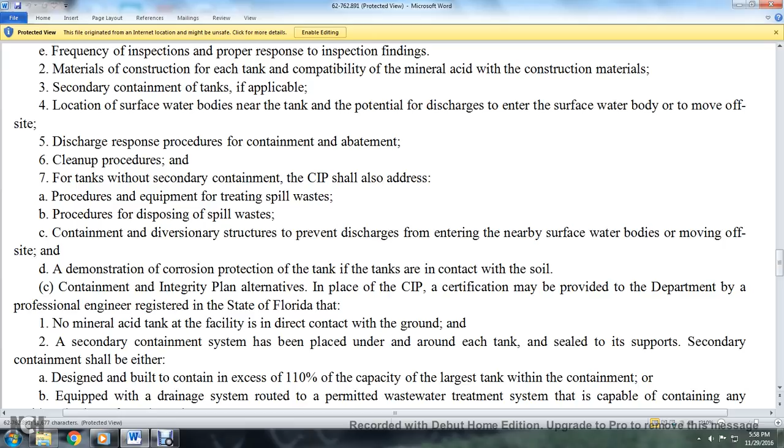Designed and built to contain in excess of 110% of the capacity of the largest tank within the containment, equipped with a drainage system routed to a permitted wastewater treatment system capable of containing any accidental release from the tank. Secondary containment of a tank installed after July 1st, 1992 shall still meet the requirements of this section.

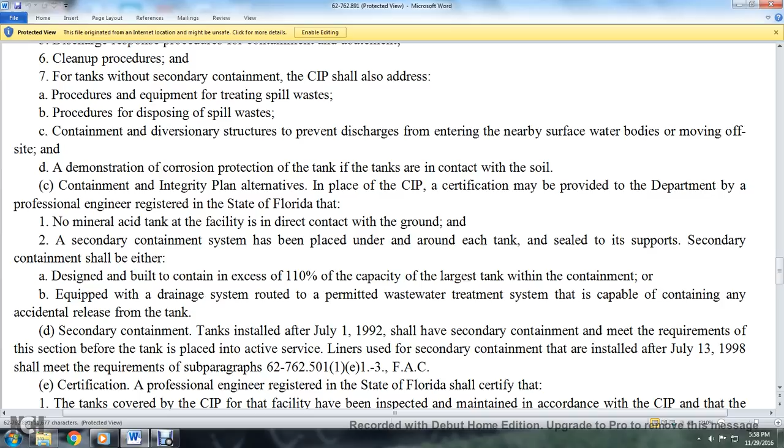Before the tank is placed into active service, liners used for secondary containment that are installed after July 13th, 1998 shall meet the requirements of subparagraph 62-762.501(1)(e)1.-3., F.A.C., Florida Administrative Code. Certification by a professional engineer registered with the State of Florida shall certify.

Alright, where were we? Let's start at number one. No mineral acid tank at the facility is in direct contact with the ground, the secondary containment system has to be placed under and around each tank at the facility in its compartment.

Sealed, and the support for secondary containment shall either be designed and built to contain in excess of 110% of the capacity of the largest tank within the containment, equipped with a drainage system routed to a permitted wastewater treatment system capable of containing accidental release from the tank.

Secondary containment of a tank installed after July 1st, 1992 shall have secondary containment meeting the requirements of this section before the tank is placed into active service. Liners used for secondary containment installed after July 13th, 1998 shall meet the requirements of subparagraph.

62-762.501(1)(e)1. through 3., Florida Administrative Code. Certification by a professional engineer registered with the State of Florida shall certify that the tanks are covered by the containment integrity management plan, that the facility has been inspected and maintained according to the CIP, and that the integrity of the containment of the tanks has not been compromised.

For the purpose of certification, maintenance will be presumed to have been performed if the professional engineer verifies that records demonstrating compliance with this subsection are available and indicate proper performance of maintenance, and that the tanks have been secondarily contained in accordance with this subsection.

A copy of the following shall be maintained and made available for inspection by the department at reasonable times: the containment integrity plan with certification, secondary containment, and the discharge response if evidence of discharge from the tank is discovered and reported in accordance with subsection 62-762.891(6), Florida Administrative Code.

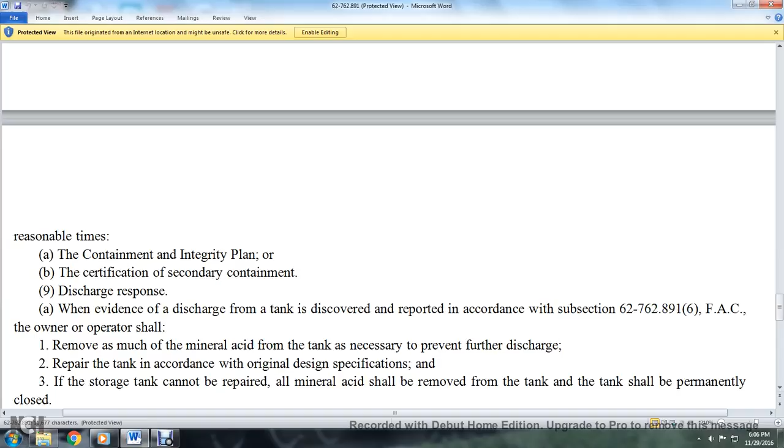An owner or operator of a facility with a discharge of mineral acid should immediately undertake to contain, remove, neutralize, or otherwise abate the discharge. Copies of the forms may be obtained by writing to the Administrator, Storage Tank Regulation Section, Florida Department of Environmental Protection, 2600 Blair Stone Road, Tallahassee, Florida 32399-2400.

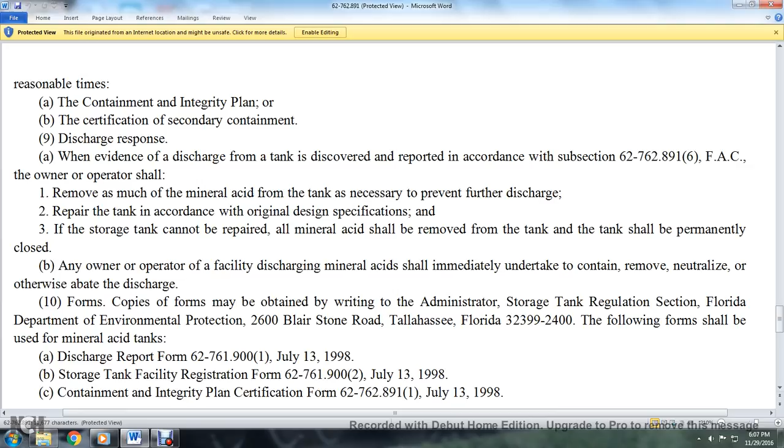Storage Tank Facility Registration Form 62-761.900(2), July 13th, 1998; Containment and Integrity Plan Certification Form 62-762.891(1), July 13th, 1998. Specific authority 376.322(3).

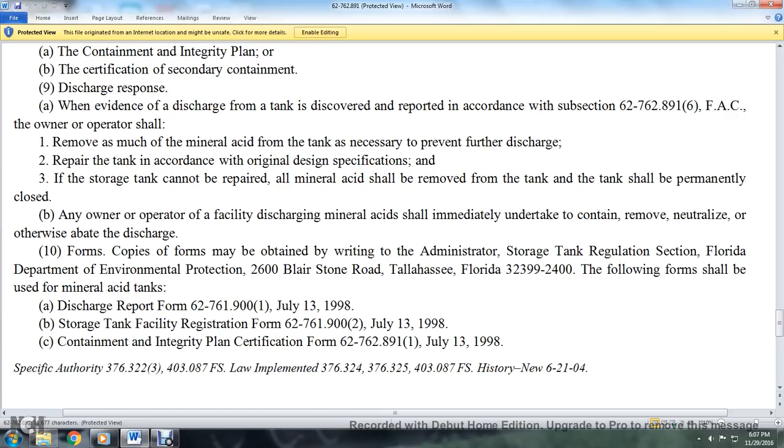Florida Statutes 403.087 implemented; 376.324, 376.325, 403.087, Florida Statutes. History notes: June 21st, 2004.

And that completes the reading of the petroleum storage systems at 62-762, Florida Administrative Code.